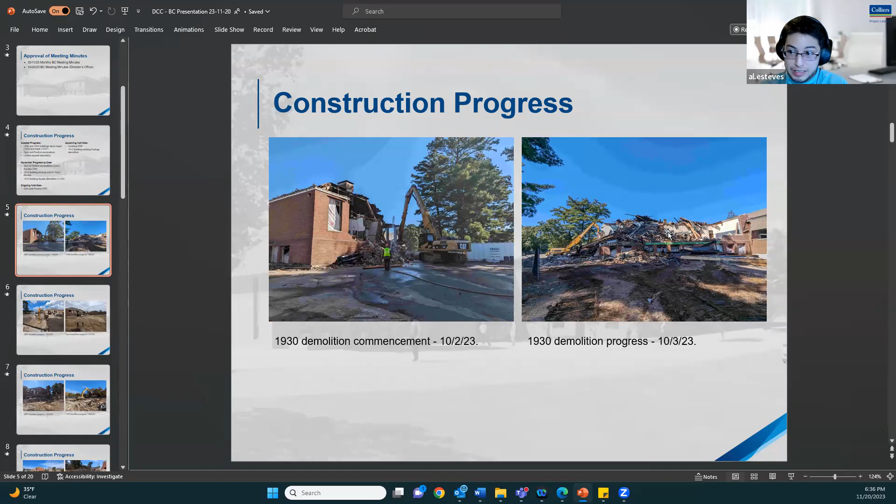You probably saw some of these pictures, but I wanted to show them because this is essentially what took place during the month of October. On the left, demolition started on October 2nd with the 1930 building. The picture on the right shows the next day, the 1930 building coming down. By the 10th or 11th of October, the 1930 building was no longer there, including the slabs, and all that remained was the perimeter retaining walls. By 11/1, both buildings were demolished and the excavations were well underway.

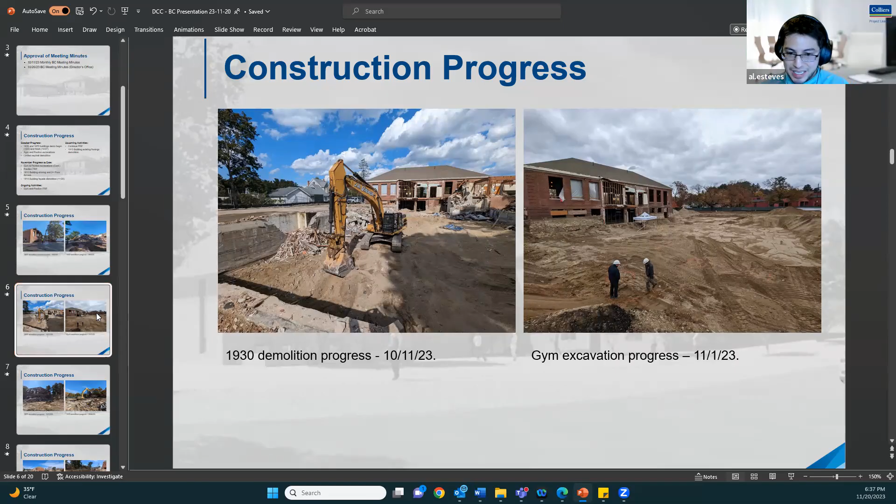I think it's worth looking at that picture and talking about the soil here. It's like a beach, and it's amazing. It's exactly like being on the beach, really strange walking in there—you feel like you're in a sandbox. It's very deep, and I guess it extends all the way to the old Lutazi pit, on the other side of the Channing Pond. It's great soil, so it can support the foundations—no deep foundations or anything required here. Good soil.

Jumping back a little bit, October 13th, or I think the 11th, was when the demolition moved from the 1930 building to the 1970 building. The picture on the left is from October 13th, and by October 24th, the building was gone, with only some slabs remaining. As you can see here, they have a good chunk of slab there that they're moving away.

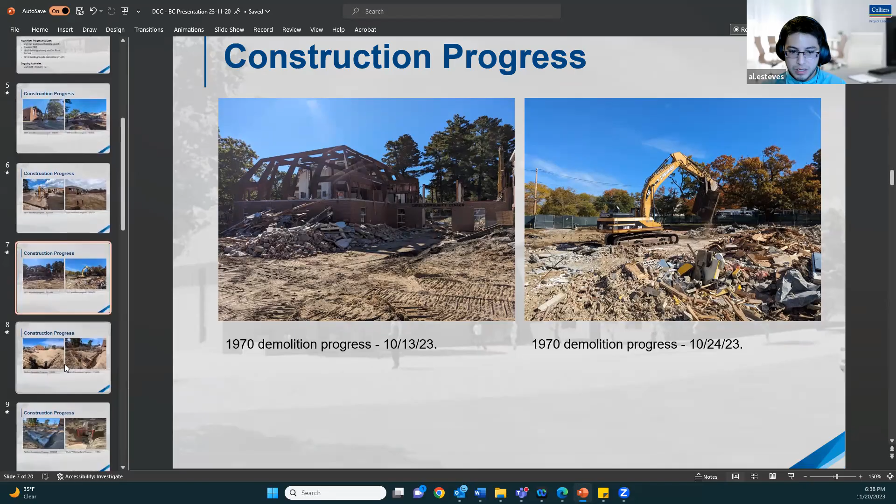By the beginning of November, the buildings were taken down and excavations for the foundations were well underway. This picture on the right is for the pavilion building, taken last week, and you can see the formwork for all the footings is done, as well as the reinforcing. This was already inspected and ready for pouring concrete—the building inspector was out there and inspected it, so that's good. All the rebar was inspected by the third-party materials testing company.

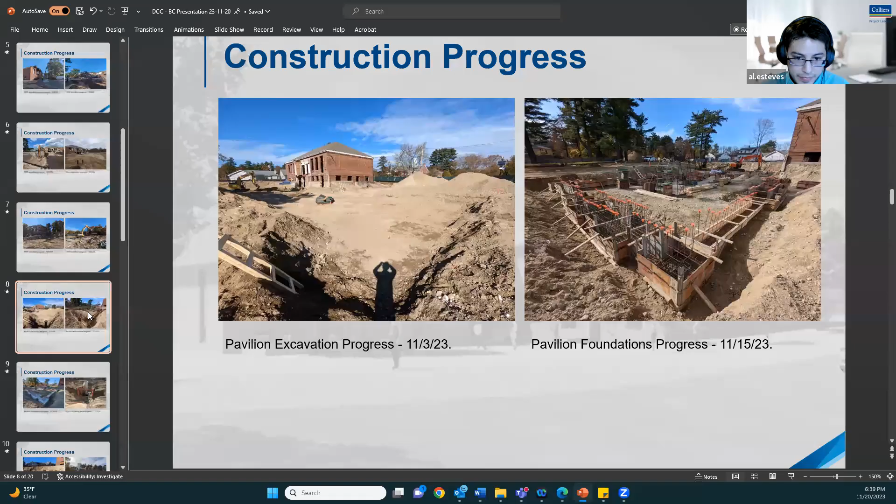The picture on the left shows the progress as of today. All the footings are already cast, and we have the reinforcing for the foundation walls—formwork for those walls is going to start next. The picture on the right is within essentially the gym building, as I call it.

This was taken last Thursday, showing the fire protection holding tank that was put in place after the pad was poured. It was poured the day before, on Wednesday afternoon, along with a couple of the footings you can kind of see here on the right. This is going to be the deepest part of the building—I think the bottom is like 20 feet, maybe a bit more, below the first floor slab. That's a pretty deep hole, as you can see here.

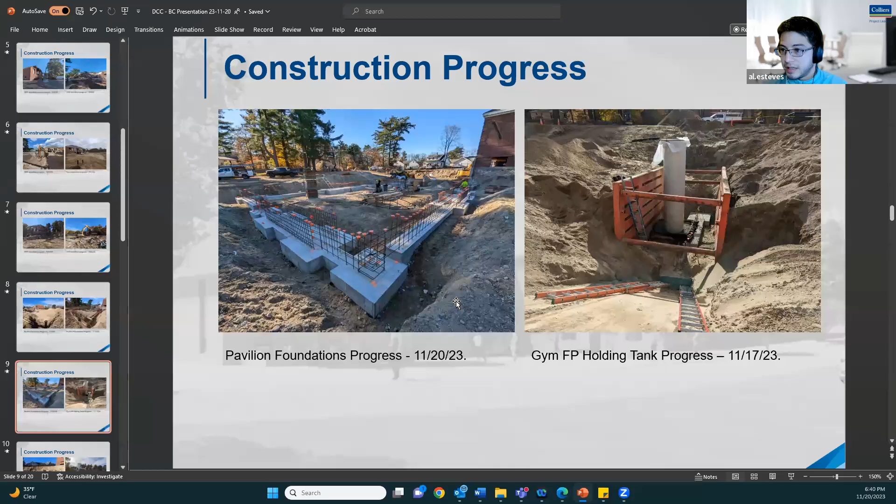The picture on the left is today, showing some of the footings being formed next around that tank location. The picture on the right, if you go to the side, shows a bunch of soil stockpiles, and they're pulling all the rocks out of it so they can backfill. They're going to reuse all this soil and compact it under the building footprint.

We haven't had to bring any soil or rocks in, correct? We're using all that's there. Yeah, there is some stone needed for backfilling, for example around the fire protection tank, but for the most part all of the soil is going to be reused. It's good soil.

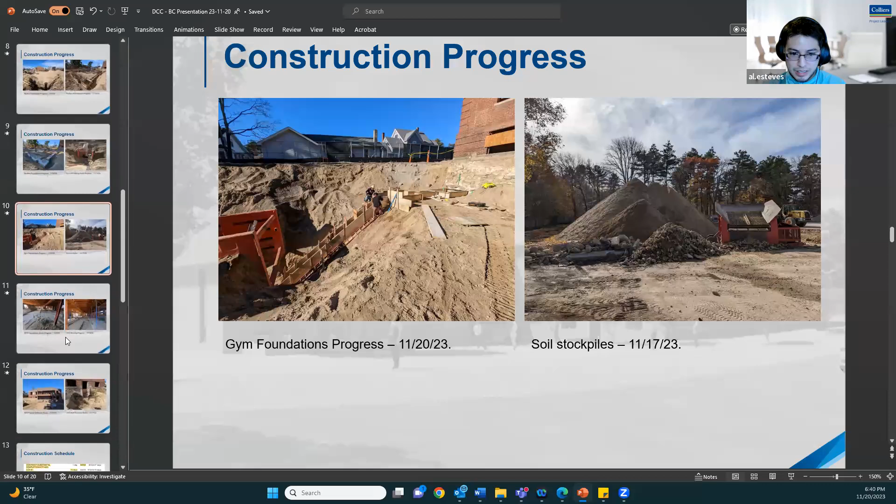In the 1910 building, the picture on the left shows what it looked like at the beginning of October, when a portion of the slabs were to be demolished—as you can see here, those were almost gone at that point. The picture on the right was taken on the 13th of November, showing the shoring going on in the basement level.

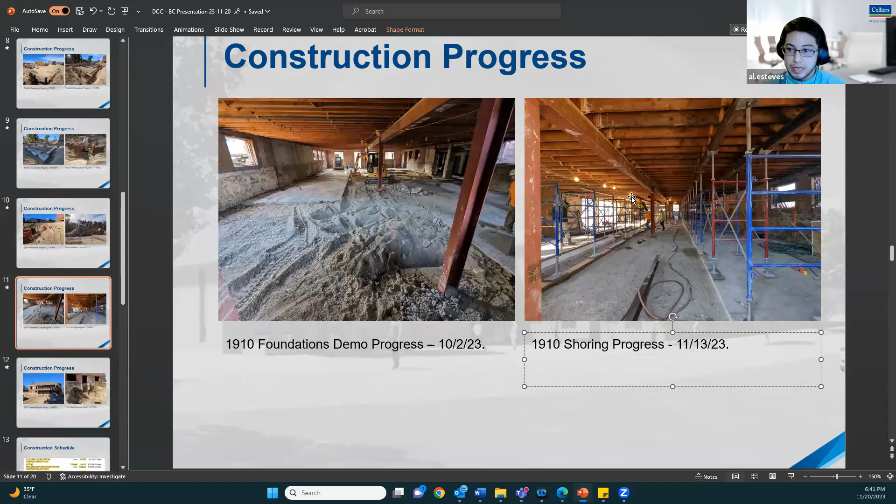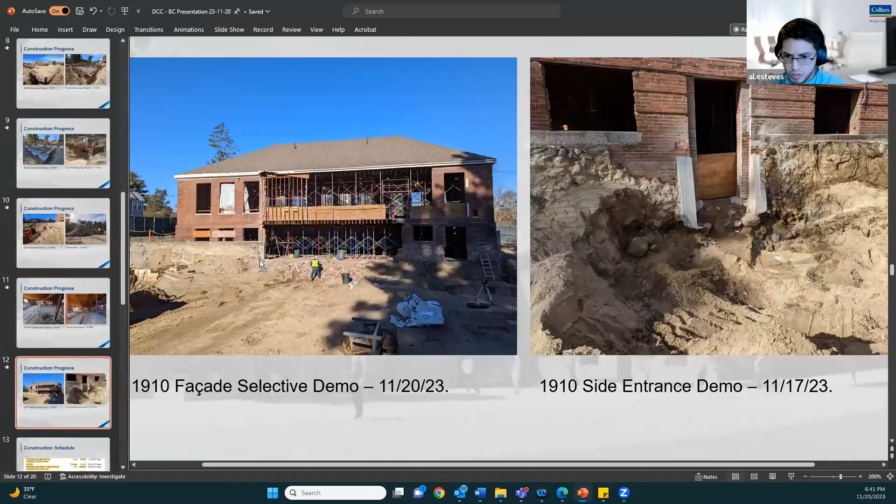Moving to today, you can see the big opening in the 1910 building. All of that was taken out in order to connect to the new building. That's pretty much done, except for a small portion, but complete for the most part. There was also a concrete entrance here that they cut and removed last week.

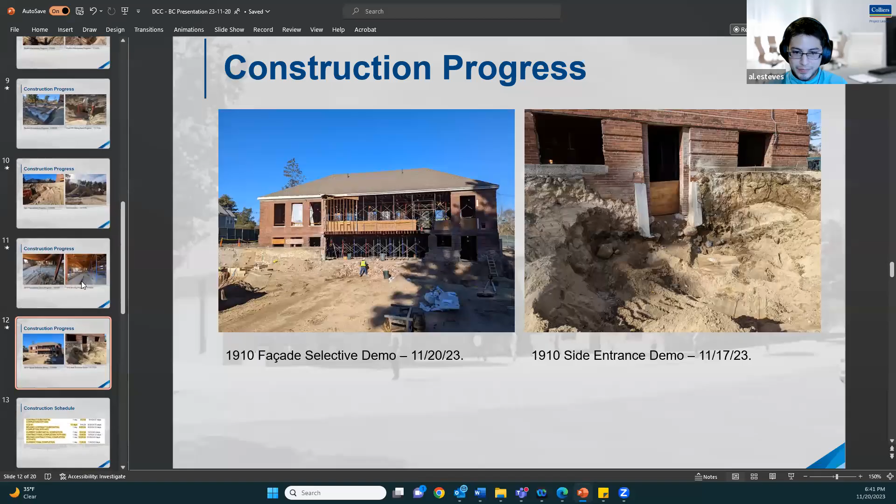Next item on the agenda is the construction schedule. There's a number of schedule items that we're working with the contractor on. Big picture is that officially we have not extended the contract duration, not yet. We're working with the contractor. They're probably going to be giving some time extension. We just haven't been able to agree on what that number is going to be yet. So we're still working on this.

Any questions on schedule? Moving on to the budget. But they're working very hard to catch up on anything lost because of abatement and all that. They want to finish it ahead of schedule, and they're really intending to do that.

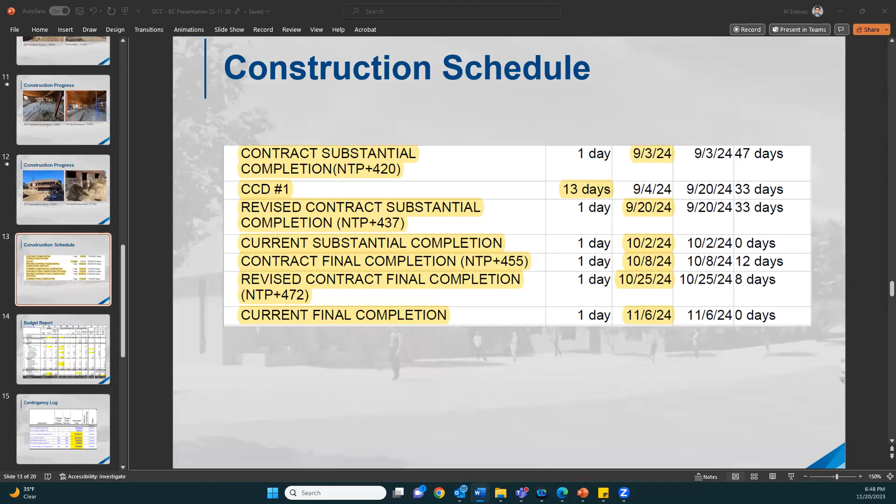How do you mean? Well, I need to see the stuff before it goes out. I know, I just said that Al will update it tonight, and then as I've done each month, I'll send it to you for your final clearance, and then it'll go to Chris for the newsletter.

Your final clearance. You will have the very final clearance, Bob. Thank you. So Al, if you wouldn't mind updating that piece that you sent me, and then I can send it on to Bob and then Chris. Sounds good, will do. Thanks.

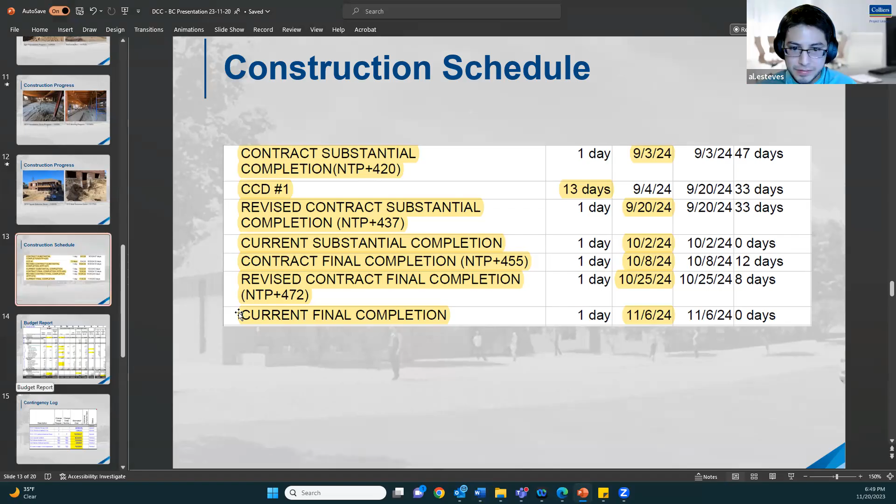Anything else on schedule? Okay, alright, budget report.

There's a few changes this time. Starting from column B on the left, there were 2 budget transfers from contingency. One of them is the contractor requesting payment for the CCD abatement work. That work was approved through a construction change directive, and has been completed, and invoices, material invoices, and timesheets were all provided. They were all reviewed, and everything appears to be substantiated, and so that's around $133,000 for that abatement work.

Now that does not include general conditions for the contractor. That's something we're working on separately. That's just for the abatement subcontractor, and again at around $133,000. So that was transferred over from the construction contingency to the construction budget.

The reason why you're only seeing 127,000 here is because we had a previous change order. The previous change order was a credit to the project, and so when you add it up, it shows up as 127,000 - that's 127.8 here.

The other one was another transfer from the owner's contingency over to the architect's line item for 8,800, and that was for the additional services associated with the director's office. On November 8th, FMA was authorized by the town administrator to proceed with the study of the director's office feasibility options, and they're working on that right now. So that's 8,800. Any questions so far?

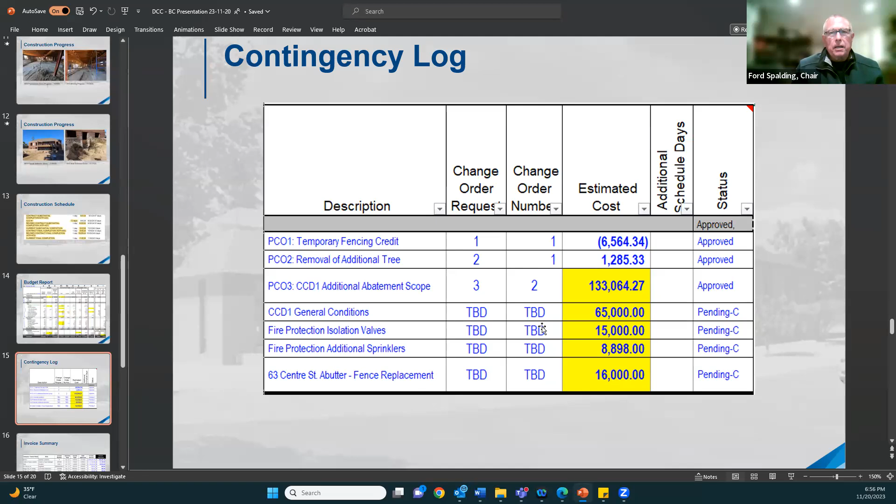That's definitely something that can wait and see where we are at the end of the project. If that's something that makes sense to do, and I don't know that yet, I would think that the town might want to do it after the project, and it'd probably be less expensive to do it outside of the project. Sometimes with these change orders, it makes sense to wait to do some of these things later on when it doesn't cost as much.

Because you don't have the markups if you're doing it yourself.

The one thing I'm not showing here, and I'll probably show it on the next one, is that FMA was released for the first phase of the director's office. The other phases aren't currently captured here. So if the director's office is fully feasible and approved, we could be looking at a total of around $70,000. That should probably be captured here, but just to give you guys a heads up. Right now we're just looking at it in phases until we're told to do something different.

So phase one is what we're working on now, and then when we get that information back, the selectmen will decide whether we should proceed or not.

All right, anything else? One of my suggestions, if we decide to go ahead with it, is to do the design work now and complete it outside of the project later on, sort of like that fence, which would probably be less expensive, but that can all be determined as we move along.